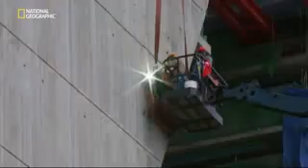Singapore's Marina Bay Sands is one of the world's most complicated construction projects. Engineers have to build not one, but three skyscrapers that will shoulder a sky park as big as an aircraft carrier. Worst case scenario, we get stuck. They have to devise ingenious solutions to assemble a 60-meter tall museum of impractical dimensions, install giant artworks, and erect seemingly floating pavilions for shopping and entertainment. If engineers succeed, they will create a virtual city unto itself.

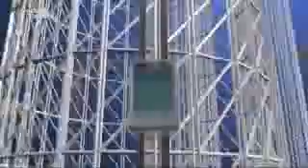Singapore, the Southeast Asian country, is smaller than New York City. The lack of space forces it to build its largest leisure and entertainment hub to date on a small tract of reclaimed waterfront land.

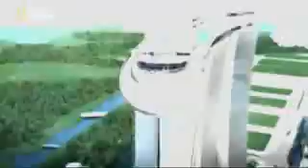The Marina Bay Sands. It's not one megastructure, but many. Serious challenges lie in the array of buildings that form the unique complex. Three 55-story hotel towers slope at such great angles, they're in danger of buckling under their own weight. An even bigger problem is the hotel's roof. A 340-meter sky park spans its length, containing gardens, outdoor pools, and the world's largest cantilevered observation deck. But how do you build something as big as an aircraft carrier, 200 meters in the air?

In the hotel's atrium, mammoth works of art have to be somehow incorporated into the architecture. Its challenging centerpiece, a 15-ton mass of steel by a renegade artist from Britain.

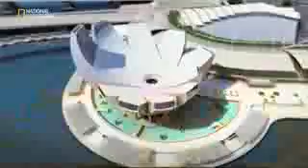A 60-meter tall art science museum is designed for maximum visual impact. It will be to Singapore what the Opera House is to Sydney. Only one problem: it seems too impractical to construct. And a set of dramatic glass-encased pavilions, while themselves pose little challenge, have to be built in water.

The man behind the Marina Bay project understands the risks, but he believes that anything short of astounding will fail. Sheldon Adelson, one of the world's richest men and CEO of Las Vegas Sands Corporation: 'What we hope to accomplish is to change the face of Singapore tourism. So we expect a very successful development.'

That is by far the largest and most expensive single project we've ever undertaken. It'll cost about $5 to $5.5 billion US. It's a lot of money. Now, I know $1 billion doesn't buy what it used to, but by any measurement, it's a lot of money today.

Adelson believes his huge investment is safe in the hands of Moshe Safdie, a world-renowned architect. Safdie is recognized for his use of dramatic curves and geometric patterns. The Marina Bay complex will be his largest and most difficult project yet. I think that the architecture has to be timeless. Therefore, what it espouses, what it provides, needs to be something that has a long life.

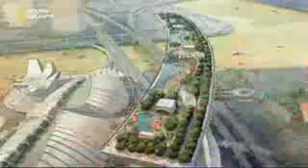What's unique about Marina Bay is all the pieces coming together. You can't think about it as individual buildings. You've got to think about it as a piece of city. It's much more a symphony than it is a sonata.

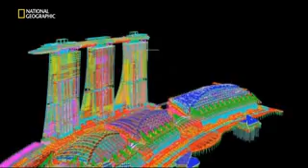On the ground, engineers are more concerned about the reality of building Safdie's vision. This is the North Retail section area. 30-year veteran John Downs is in charge of overseeing the entire project. The design is very, very diverse, and each component of the project is totally different from the others. For a project of this size, you'd expect with the planning, with the design, with the construction, you'd be expecting somewhere between 6 to 7 years. Here is basically a 3-year turnaround.

The first and most critical construction task is to secure the footprint, though this normally straightforward job proves otherwise, since the site was originally allocated for boats. The complex sits on 560,000 square meters of reclaimed land, part of a decade-long plan to revamp Marina Bay, a former saltwater estuary that's now a freshwater reservoir.

Beneath the reclaimed land, which is essentially a seabed, is a dangerous layer of marine clay. Sometimes called black toothpaste, marine clay has very poor structural properties. If not given complete respect, the unstable marine clay is potentially fatal.

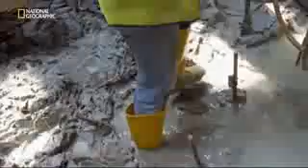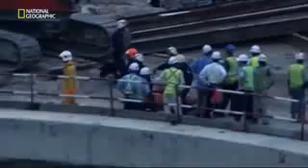In 2004, Singaporeans discovered the lethal consequences firsthand. A routine excavation in an underground tunnel for the mass rapid transit network causes a collapse, creating a gaping hole in the Nicoll Highway, killing 4 workers.

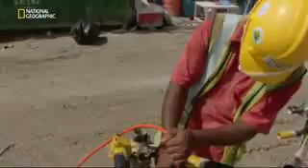The ground conditions in which they were building the Nicoll Highway were not dissimilar to those in which we are encountering here. They had also soft clay, they had similar depths of excavation between 20 and 37 meters. One of the big things that was learnt in the Nicoll Highway collapse was the importance of monitoring movements and the control of quality as the construction proceeds.

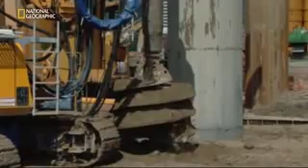Marine clay is an old foe of engineer Mike Barton. He's defeated it in the past by understanding how it behaves. The big problem with marine clay is that it is so soft that when you dig out the inside, the walls will move and potentially collapse and allow all the surrounding water in the bay into the excavation. So, before work can begin, the unstable building site needs major fortification.

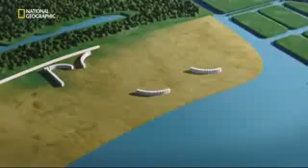To combat marine clay, engineers decide to build giant concrete walls to create stabilizing perimeters for the larger buildings, known as diaphragm walls. Up to 1.5 meters thick, diaphragm walls are steel-reinforced concrete sections, pounded 50 meters into the ground. They form watertight enclosures for men and machines to work round the clock.

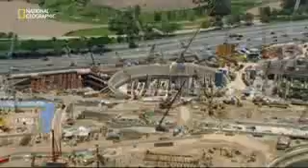In just 1 year, over 4,000 meters of diaphragm walls help produce a rock-solid foundation. The diaphragm walls that we constructed in a formation which we called a peanut formation, which is 2 circles joined together, and a donut formation, which is circular, are able to withstand very, very large forces from the marine clay without any movement. They encapsulate an area that's bigger than a football pitch that enables us to excavate very quickly and to build structure up very quickly.

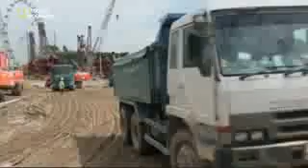Securing the footprint of the Marina Bay project has already taken a year out of John Downes' schedule. He now faces the difficult task of erecting the resort's many buildings in a space of just 2 years. Just managing the whole logistics of that, including the construction methodology, is very, very challenging for us.

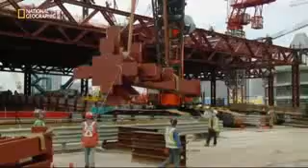To meet his tight deadline, Downes chooses the most direct solution. He hires 16,500 workers to construct every single building, simultaneously. It's like leading a small army. So organizational excellence is key.

We're just on the edge of Singapore in the CBD here. So rather than lose the contractors and the workforce to go off-site, we built our own 3-story project office. We have all of our contractors, our subcontractors here. We house our resident site staff. We have our project management team. We have our construction management team, our design management team, and the logistics here.

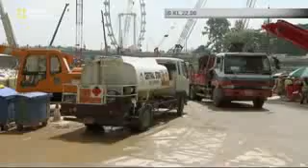The tight schedule also creates problems at the hotel towers, where engineers are already struggling with a congested site. The important thing to do is to make sure that they come in and deliver the goods straight away and then get out again. We don't want too many vehicles on site at the same time.

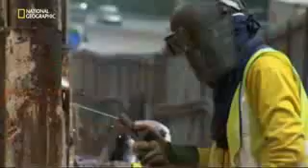To speed up construction and alleviate traffic congestion, engineers turn to a method that's proven itself countless times in the field: in situ concrete casting. Hotel walls are made on site in the thousands. And workers laying the floors are so proficient, they produce 1 floor per 4-day cycle. It's an impressive display for a conventional solution.

But the structure they're attempting is anything but conventional. The key challenge of building the hotel towers is its unusual design. Unlike other skyscrapers, part of the towers slope at incredible inclines. Like a set of collapsing dominoes, the towers could buckle under their own weight if a practical building solution is not found.

It's a major concern for engineer Craig Glover. I've been in the industry for 25 years, done a wide range of projects in many different countries, but nothing compares to this whatsoever. There was nothing we could take reference from across the street, on the next high-rise, or across town. This is a new frontier.

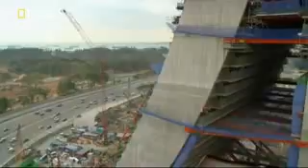Costing a staggering $5.5 billion to build, the Marina Bay Sands could be one of the world's most expensive mistakes if engineers can't solve the tower's problematic structure.

Engineer V.C. Cheong leads the design team, and their solution comes out of left field. If you look at the configuration, it's not a straight tower. It's with a sloping leg. So all this sloping leg actually is, inducing a very huge external force onto the structure. We can't build it without any support. So we actually formulate a solution to prop up the sloping leg.

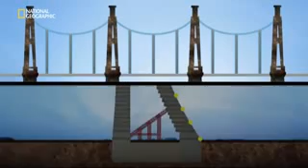Using a technique they've never employed before, engineers build large temporary struts made of strong structural steel. They prop up the sloping towers as they rise. Like a suspension bridge, high tensile steel tendons, also known as tension cables, give an added layer of support inside the walls. In theory, both the struts and the tension cables are temporary and will be removed once giant link trusses connect the towers at the 23rd floor.

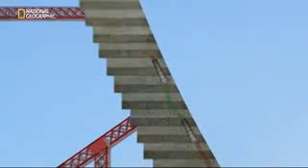The sheer weight in concrete is enough to topple the towers at level 8 if the engineer's calculations are wrong. To reduce the chances of failure, Glover and his team make a radical decision. Instead of removing the temporary tension cables in the tower walls, they make them permanent supports. I feel good it's in there because it's added strength, it's added support.

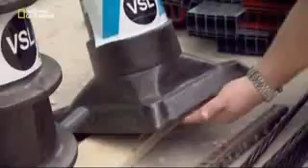We have a twined network here of high-strength steel. And what we do is we bundle these up so they form a cord with multiple strands inside this conduit. We place this conduit inside the walls prior to casting the concrete. So what we then do is once the concrete is cast, we anchor one end into the concrete. So we then put a very high-strength hydraulic jack onto the collar and one by one pull these strands through and tension them up. What that does is basically pull the building back and hold it in place.

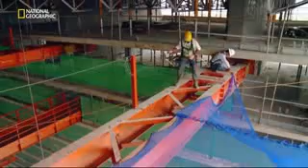If these cables were to suddenly break or if they weren't in place, we wouldn't be able to control the self-weight as we build more and more of the building up. Despite the team's quick thinking, the true test of their engineering decisions will only happen once the main support struts are removed and the massive link trusses installed.

Link trusses are huge reinforced steel brackets that bind the towers at the 23rd floor.

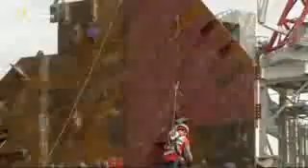Once their installation is complete, they transfer the sloping tower's weight completely away from its temporary struts. Once we're satisfied that we don't have any stability issues, then we can bring the large hydraulic cranes in and, member by member, start to dismantle the struts. We've got a lot of time pressure, so we've just got to make sure these things keep moving.

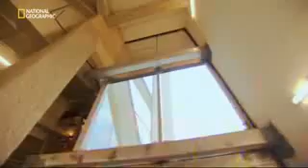As the last pieces of support struts leave the site, Glover and his team can finally breathe a sigh of relief. The link trusses are holding the building load. So far, so good.

Unfortunately for engineers eager to start its construction, architect Moshe Safdie isn't happy with its current shape. Somebody looked at them and said, looks like a bunch of bananas. In fact, Mr. Adelson said, looks like a bunch of bananas. I said, well, if they look like a bunch of bananas, we're not there yet.

It's terrible news for Safdie's design team, especially its principal, Gene Dyer. There are times that Moshe will come in with an idea. We think it's quite exciting. We'll pursue the idea for weeks or even months. He'll come back and say, I want to change the idea. And we've already bought into the idea, so it's a bit frustrating.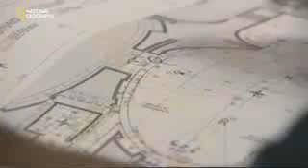To rework the unique geometry and dimensions of the Art Science Museum, Dyer and his team turned to advanced 3D modeling programs. It not only makes navigating the museum's complex geometric patterns easier, it shortens the process to a matter of days. The model is dynamic and it can be moved by just changing one or two elements. Moshe could experiment. He could make rapid judgments in a very short period of time about which way he wanted to take the project. This is a process that was impossible to do 10 years ago. Without the computer, this would take years and years and years.

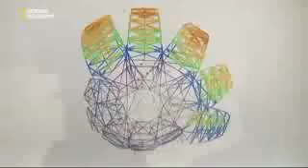After months of refining the design, Safdie is finally happy with the result. The mathematical precision that we gave them made them even more beautiful. It led some people to say, well, hand of welcome. Others said, is that a lotus? And the more ambiguous the associations, the closer I thought we were getting to our target. Because I think the least exciting buildings are those which have overt symbolic associations.

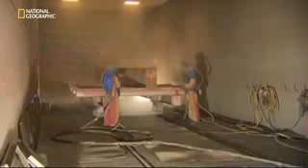Armed with the new design, engineers begin work on the museum's 60-meter-high superstructure. A staggering 5,600 steel elements weighing some 5,200 tons are prefabricated to exact specifications. They are then trucked onto site and assembled. It's like putting together a giant jigsaw puzzle. Each element has to be installed with pinpoint accuracy. If it's even a few millimeters off, engineers will have to start from scratch.

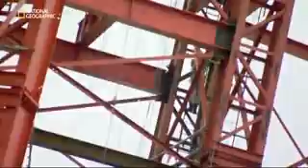Engineers of the massive atrium at the base of the towers are facing an equally tough construction process. Safdie has come up with a challenging design. He wants to inject art into the atrium's architecture, so that visitors will feel like they're walking through a grand Gothic cathedral. In medieval times, if you think of a Gothic cathedral, there's the architecture, there's the stained glass windows, there's the sculptures on the pinnacles. You cannot draw a line and say art and architecture. Art and architecture are one, they're singular experiences. And I think what we try to do is come back to this integrative mode.

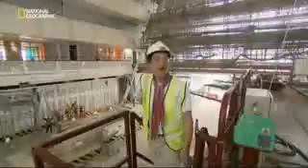To create the centerpiece of his vision for the atrium, Safdie commissions renowned British sculptor Antony Gormley. Famous for his unusual approach to art, Gormley is the brains behind the Angel of the North sculpture in northern England. What he's about to attempt is proving to be more of a construction challenge than an artistic one.

A cloud-like sculpture some 40 meters long, made up of 15 tons of high-grade stainless steel, hung 12 stories above the atrium. The Angel of the North is, in a way, making a very traditional public sculpture because it's isolated in space at the edge of a valley. You can see it for miles and miles. It's very much about occupying space. This is about activating space.

But just as they're about to begin construction, a bombshell drops. September 2008. A global financial crisis wreaks havoc on markets. The flow of hundreds of millions of dollars that keep the Marina Bay project going every month suddenly stops.

For engineer Matthew Pryor, it's a massive blow. I feel devastated. It couldn't be worse. Probably the worst day of my life professionally. There's no more money coming through. So unless we put some funding in place or there's something, we're going to have to shut the jobs down. There's a tough decision to be made, and we don't know what we're going to do just at this point in time.

With the future of the multi-billion-dollar project plunged into doubt, all eyes turn to the man behind it, Sheldon Adelson. The next move of one of the world's richest men will determine the fate of the mega construction site.

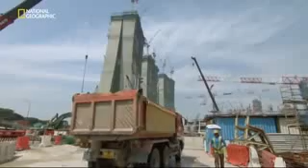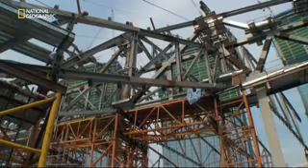The 2008 global financial meltdown is a haunting echo of the 1990s Asian crisis. Back then, progress on Shanghai's World Financial Center came to a complete halt for 5 years. For Adelson, that's simply not an option for the high-profile Marina Bay resort.

His vision of changing the face of Singapore tourism is at stake, and so are billions of dollars of investment from his Las Vegas Sands Corporation. He prefers finding a stopgap solution to weather the storm. Throughout history, there has never been a trend that went straight up, nor a trend that went straight down. So it goes up and down. It's only a matter of time when things will recover.

In a bold move, Adelson pledges his vast personal wealth to the completion of the project, effectively ending any speculation of failure.

There's a massive sense of relief in the company. Everyone was pleasantly surprised how quickly we've got through this, and the fact we could hold it together and get it going again. So euphoria is probably the best way to describe it.

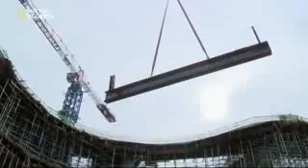With the crisis averted, construction on the 3 57-story hotel towers, the casino, theatres and convention centre resumes at pace. Everywhere you turn, steel is being installed. It's vital reinforcement for every concrete structure on the 15.5-hectare site.

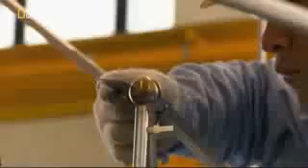For one project at the tower's atrium, steel is more than just reinforcement. To construct the 15-ton Drift sculpture by British artist Antony Gormley, engineers had to first laboriously prefabricate it into over 70 segments. The segments are then welded into 8 slices that will ultimately form the sculpture. It's a tricky operation, but engineers are able to complete it swiftly due to a system of codes and numbers that enable them to quickly identify what goes where.

Once all 8 slices of Drift are fully assembled, it's lifted up into position by a temporary lifting frame. A massive box truss on the atrium ceiling then takes over the load. In theory, the box truss will support the weight of the lifting frame as it's being lowered down.

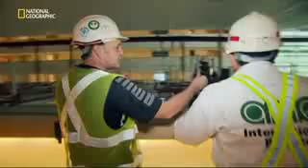It will be a heart-stopping moment, especially for engineer Graham Stevenson. The lifting frame is about 9.5 tons, so when it picks up and gets some momentum, there's a potential that it just wants to flick over and rotate through its full 90 degrees, and we won't have it under control.

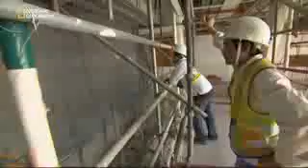Stevenson's solution: 4 powerful automated hoisting drums located at the 4 corners of the frame. They allow workers to control the strength and speed of the operation with high tensile steel cables. A spotter at the top determines the pace of the procedure and marshals the team.

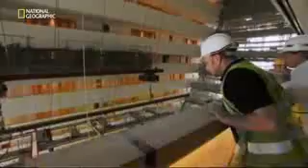The entire operation is estimated to take up to 10 hours to complete. As soon as the frame is in motion, there's no turning back. Midway through the lift, Stevenson receives reports of a potential problem.

22nd story, number 7 temporary cable, scaffolding touching the cable. Why you got the temporary cable touching the transverse? Yeah, but is it just the end of a tube? Yeah. So you can just cut the tube? Yeah.

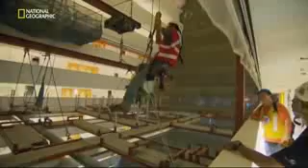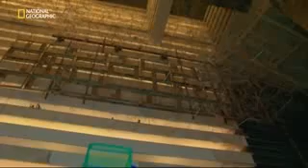Problem solved. But what was previously an estimated 10-hour procedure now turns out to be a 24-hour marathon lift. At 6 a.m. the following morning, they complete the job. Absolutely fantastic. The Gormley is now finally in its final position, so really an end of a long and exhausting day, and big thanks to everybody, but it's finally done.

While Drift settles into its new home at the Hotel Atrium, elsewhere attention is focused on one of the project's key features: the Crystal Pavilions. The 2 glass-encased buildings by the promenade are set to be the resort's premier shopping and entertainment complexes. But before engineers can make them a reality, they have to secure their footprint, and already a major obstacle threatens to sink their objective.

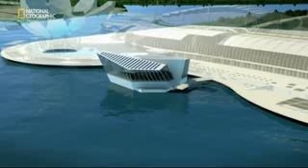The Crystal Pavilions are situated within the confines of Marina Bay, so to found it, engineers have to find a way to build in 6 meters of water. The responsibility of tackling the problem falls on the shoulders of engineer Kurt Vella. I'm from Sydney. The underlying foundation in Sydney is sandstone, it's rock. All you need to do is just dust off the surface and you can build skyscrapers on it. Here it's very different. All the structures have to be heavily founded.

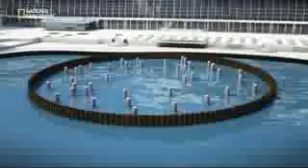To keep water out of the construction site, only one solution seems viable for Vella and his team: a waterproof steel structure called a cofferdam. This temporary formation surrounds the worksite with a circle of steel sheet piles, creating an impenetrable shield that locks out the water, keeping the workers safe within. For the job, they rope in a 12-ton vibro hammer. It punches the sheet piles deep into the earth, making the cofferdam rock solid and resistant to movement.

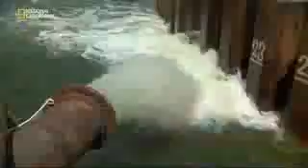With the cofferdam secured, engineers deploy powerful diesel pumps and run them 24 hours a day, ejecting any water that remains within the walls.

This last step comes with inherent dangers. The force of the water outside creates what engineers call hydrostatic pressure. In theory, it's powerful enough to force water through any gaps in the cofferdam. It's something that Vella prays will not happen. There's a bit of hesitancy and concern because we've got to build this building in the middle of Marina Bay. Everybody can see what we're doing, so if it leaks, it's a problem. If it fails, if it moves, if it collapses, it'll be an absolute catastrophe.

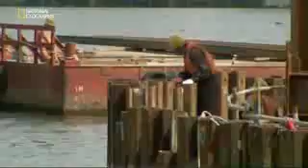After a day of pumping, Vella's worst fear comes true. Parts of the cofferdam are leaking.

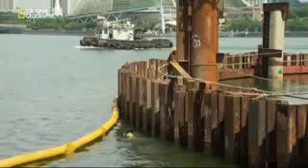To rectify the problem, Vella orders a team of 8 divers into the water on 10-hour shifts. Their mission: find out where the water is being forced in and plug it shut with epoxy resin.

Anson Lee is an 8-year diving veteran. The toughest part of our job is the environment. The visibility is poor here, it's totally zero, I cannot see anything below. I solve that by feeling the suction and then feeling out the thing. You have to overcome all the fear that you can't see under the water. But I feel proud to be one of this team to build this thing out.

After 2 weeks of hard work by divers and the pump crew, the job is finally complete.

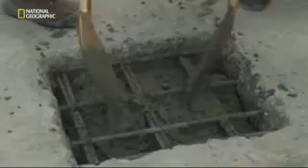After 2 years of battling the elements and overcoming difficult construction milestones, the 3 sloping towers of Marina Bay Sands can finally celebrate their topping off ceremony and move on to the next phase.

But a destructive force of nature threatens to throw a spanner in the works. With climate change predicted to affect the pattern of Southeast Asia's typhoons, Singapore may one day experience the destructive tropical storms plaguing its northern neighbors in the Philippines and Taiwan.

When that happens, typhoon-force winds could spell disaster for the hotel towers, especially the 340-meter Sky Park sitting on top of it. The force of the wind can make both buildings sway dangerously, causing irreparable damage to the structures.

The Sky Park offers 360-degree views of Singapore. The visionary design will have enough surface area to park 4.5 Airbus A380s.

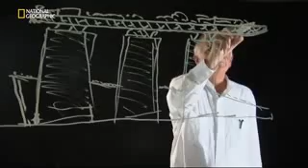But when architect Moshe Safdie first mooted it, it stemmed from a purely functional need. Luxury hotels, as we think of them, always have lots of open space around them, gardens, at least in the kind of tradition, but we didn't have much space left. And at that point, I figured, well, if we cut out of an extrusion of foam the kind of slab that goes over those 3 towers, and we placed it there, and we said, well, what do we have here? My God, that's some power. And so that's where the idea was born.

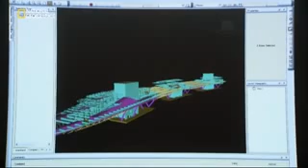Engineer Tony McKee has little time to make things happen, still having to do all this planning. At the moment, we're running a couple of weeks behind what we'd originally planned. We're not entirely happy about it, but at the end of the day, we've got to do this safe and we've got to do it properly.

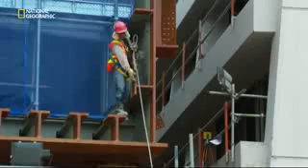To fight the enemy, McKee knows he has to first understand the enemy. He hires leading US wind engineers CPP to carry out extensive testing on the towers and Sky Park.

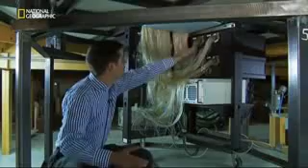The thing that makes this really special is the fact that we have the Sky Park running across the top, linking all the towers together. So whereas normally with a normal tower, we'd measure the loads on the tower in isolation, with this one, what we're needing to do is measure the loads on all three towers at exactly the same time. That way we can know how the towers are going to move relative to each other, so we can make sure that they're not going to put excessive strains or movements into the Sky Park.

During the tests, a scale model of the Marina Bay Towers is blasted with 40 km/h winds to simulate faster typhoon winds in reality. Over 1,000 pressure measuring instruments inside the model register how the winds affect the buildings. At the end of the tests, engineers confirm that the three towers can deform by some 200 millimeters during the fiercest storm.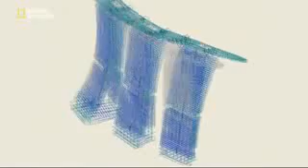Engineers quickly figure out a solution: movement joints. Inspired by bridge engineering philosophy, movement joints are essentially gaps located between the concrete towers. The huge gaps allow for movements of up to 250 millimeters.

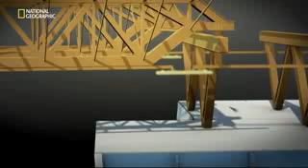Aluminium and stainless steel plates act as sliding components. They can move back and forward over each other, a little bit like you'd see in a flexible bus, where you have that articulation happening in the middle. It's a similar concept to that. To accommodate the differing movements of the three towers, engineers install multi-directional steel bearings below the Sky Park.

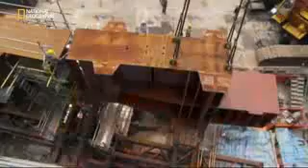Armed with the final results, McKee can now safely begin construction of the Sky Park. Consisting of some 10,000 tons of steel, the Sky Park is as big as an aircraft carrier. The most practical way for engineers to construct it is to break it into 14 segments on the ground before assembling it at the top of the towers.

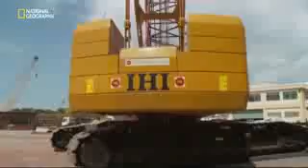There's no room for miscalculation at 200 meters in the air. Each segment is carefully prefabricated and tested by steel specialists Yongnam, and then trucked to the site independently.

From the very beginning, McKee and his team anticipate that their biggest challenge will be lifting the two largest segments of the Sky Park, the box girders. Measuring 80 meters long, their combined weight is a staggering 1,400 tons.

How do we feel? A little bit of apprehension. It's a significant lift that hasn't been done before. If something goes wrong, it could be really significant for us.

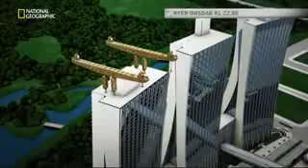To reduce risks, McKee turns once again to proven bridge building technology. In a process known as strand jacking, giant temporary lifting gantries made of strong structural steel will use powerful hydraulic jacks to lift the box girders up to the top of the towers before sliding them into place. It will be the longest and largest lift of its kind in the world, and McKee needs the best in the business. He puts a pioneer in the field in charge.

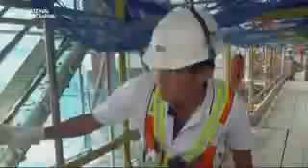Swiss-French company VSL. Engineer Eddie King and his team have successfully raised bridges, stadium roofs, and even Ferris wheels.

The toughest work of my work is to have to plan it everything very precisely, because everything to set up in millimeters. So we have to lift up and slide it in and position it in 5 or 10 millimeter accuracies. If we don't do it properly or don't do it safely, the biggest hazard is the thing can fall down to the ground.

Other factors further complicate the lifting process. Due to an increasingly tight schedule, the team is forced to conduct the lift during Singapore's annual monsoon season. It's almost impossible to predict when a tropical storm will hit. When it does, the accompanying lightning strikes can endanger lives.

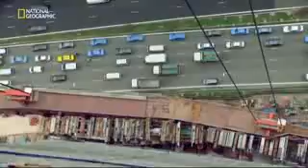And because the whole operation takes place meters from a jam-packed highway, curious onlookers will be able to see any mistakes the engineers make. It's a potential public relations nightmare.

Okay, now I stop now.

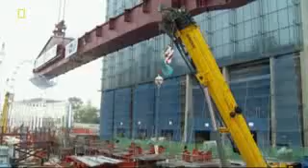During an estimated 16-hour lift, the box girders will move at a cautious 14 meters per hour.

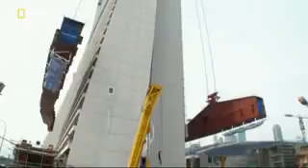Despite the team's best efforts, Mother Nature catches them by surprise. Okay guys, rain is coming. Better we stop here.

An approaching downpour threatens to grow into a lightning storm. We are at 200 meters above and surrounding building is quite far away, so there's a chance of lightning striking on the high point like this. So we got to stop and wait until the weather gets better before we continue our lift.

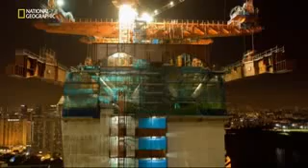After a tense 3 hours, the lightning threat passes, and the operation cranks back to life. By the time the box girders slide into position, it's past midnight. Everything went quite smooth today, so we hope tomorrow we can do the same.

With the lessons learned from the box girder lift, the rest of the segments go up smoothly. As the final piece rises into place, Singapore is already marveling at the team effort behind one of the world's most ambitious building projects.

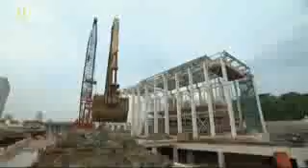In just 3 years, engineers overcame seemingly impossible construction challenges, defeated marine clay, engineered ingenious design solutions, and survived the most debilitating financial crisis since the 1930s. As the finishing touches are put on the resort, the stage is set for an opening party, Singapore style.

Those involved reflect on the project that has already far surpassed their expectations. It's a bit overwhelming, you know. I'm in the process of disconnecting the umbilical cords. Not easy for an architect.

This type of project probably only comes around every 25 years or so. So it's been a lot of hard work, extremely challenging. I really can't imagine, I couldn't list the number of challenges we've overcome along the way to get to today. Everybody is saying this is kind of a miracle, never seen anything like it. And it's rewarding, it's nice.

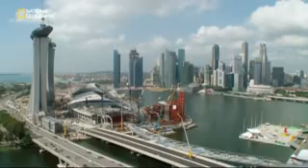The Marina Bay Sands, Singapore. Proof that with visionary design and engineering know-how, megastructures can still defy the odds and fulfill the wildest dreams.